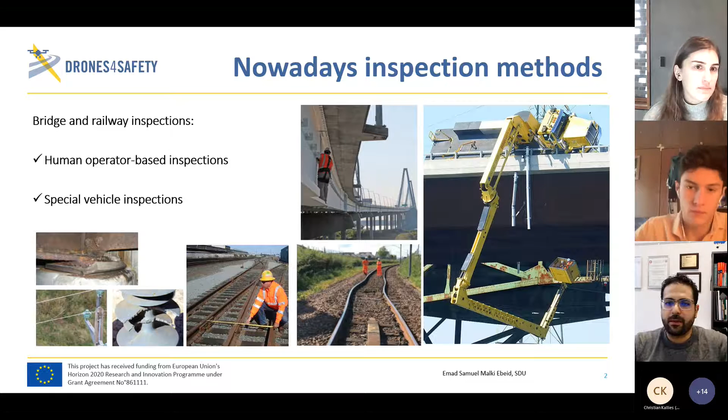So our mission is to remove this situation in which the human is at risk by using advanced technologies. That is Drones for Safety. We aim to build an autonomous, self-recharging, and collaborative drone system to inspect a large part of the transport infrastructure.

The project has 3 academic research partners - SDU, Aarhus University, and Fraunhofer - and industrial partners Del Air, NEAT, Deep Blue, ERIC, a research center from Italy, EU Center, and Eurocontrol for regulations.

We are at the same stage as the other projects, in the last phase. The project will end in May 2023.

So that is the overall concept. Our aim is to use power lines to recharge the drones. The drone will gain power, fly to nearby bridges, take pictures, and send them to the cloud. They will be analyzed, finding defects, and sent to the end user. They can do the same from railways.

We have very ambitious ideas to recharge from the railway lines, and also to inspect trains. We also discovered that many bridges are within short distance from power lines. If you go 1 kilometer from a high voltage line in Europe, you'll find 15% of bridges; if you go 3 kilometers, it becomes 70%. So it's really an approachable distance if you think about a drone flying for 20 kilometers.

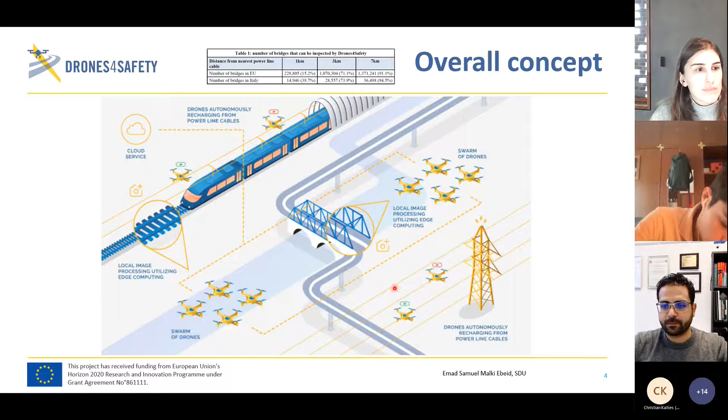Our idea is to make a set of drones, a swarm, capable of self-recharging from overhead lines. They do autonomous inspection, running algorithms on board using edge computing and AI to detect defects, training a neural network on the collected pictures. All of that is connected through the cloud for mission control - where the drone should go, what data to collect, and which path is good for them.

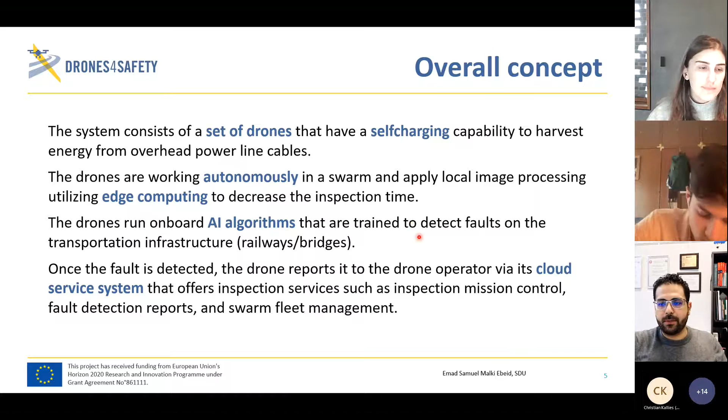In Drones for Safety, we built our own hardware platform, because our mentality is more research-focused - we'd like to get our hands dirty, opening up open source software and hardware, fixing issues, making them better, and getting it to work. We used a flight controller called Pixhawk and PX4 autopilot, from other EU projects, to make the drone fly. With this system, one can make any piece of metal with motors fly and be controlled from the ground.

And here we come with the companion computers. We use advanced computers called MPSoC, multiprocessor system on chip, that is FPGA based. The processor basically has two parts: a CPU, where we run ROS2, and an FPGA, where we run heavy algorithms like computer vision. That way we relax the CPU by delegating the heavy tasks to the FPGA side.

This computer is connected to sensors that are lightweight and fitting for our mission to detect cables and do the inspection. So the sensors we use, for example, are magnetometers, cameras, and also millimeter wave. We will see in the next slide how they look like.

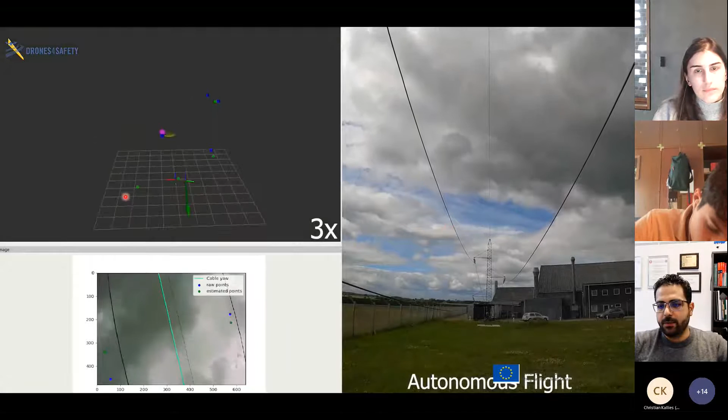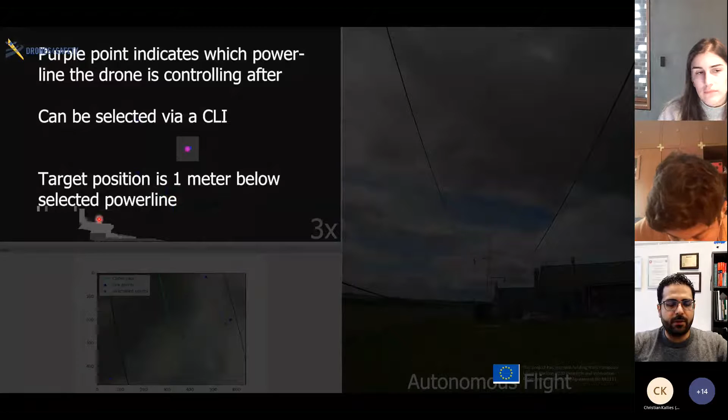This is one of the videos showing how the system works. Here we use simulation, with data collected from the drone. You can see the purple dot identifying the cable.

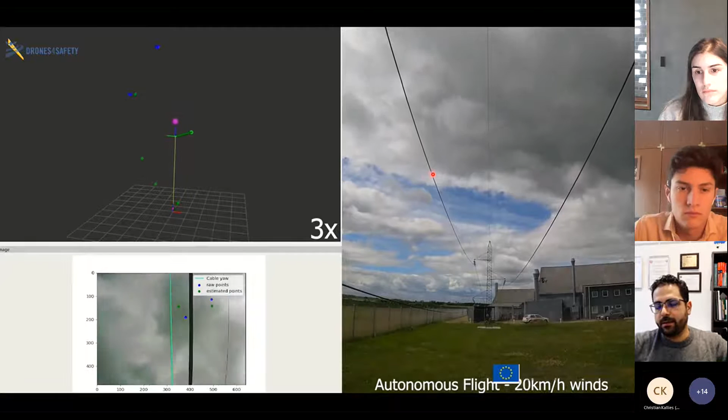One can select this and say, I would like to fly the drone to stay 1 meter far from this purple dot. You can see here the drone in autonomous flight, orienting itself 1 meter far from the power line. So it becomes really user-friendly. Once I go to line phase, say 1 meter or half a meter, touch the line, that comes from the CLI, and then we give it the command.

The drone uses two sensors, the camera to know the orientation of the line, and the millimeter wave to know exactly where the line is. We get really good results thanks to the clean background here, because we see the sky. So we have a really good and accurate system.

That is one of the latest works, in which the drone was performing a mission like this. Our latest article was published in the IEEE Access Journal, and it's open source, open access, so you can also see how the system and algorithm are designed and working.

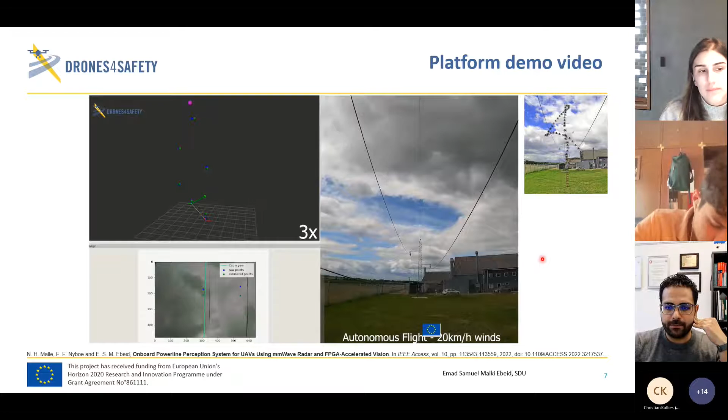The next part of the project is energy harvesting. When we charge, we have two types of lines: one is AC and one is DC. For the AC line, we benefit from the magnetic field. We use a split core current transformer with a coil to harvest energy, working as an energy harvester. We have to surround the line, so we grasp it and then induce current.

The other interesting part is the DC lines. DC means we need to connect between 2 points, plus and minus, and it requires a very advanced circuit that we are almost finalizing. Basically it's like a DC to DC converter to lower the voltage and charge the drone. The advantage here is that it's lighter, since we don't have a core, but it's also quite challenging to work with because the DC line requires connecting 2 points together.

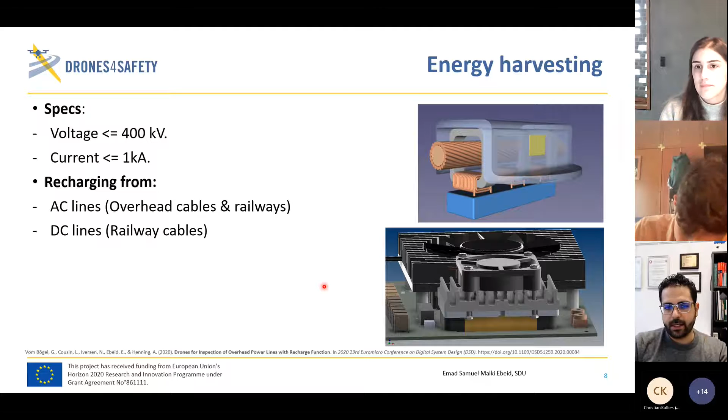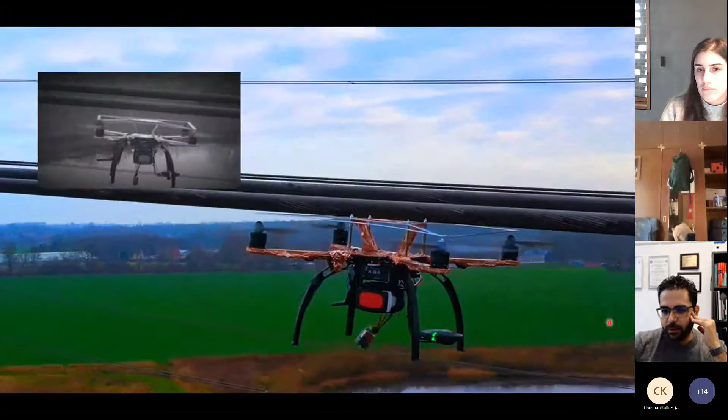Then we touched 400 kilovolts, that was basically in the street, you can see the houses behind. That was not okay, because there were some issues with the Faraday cage, so we had to redesign the protection side. Then we understood what went wrong, and now we have a better drone that is quite stable under a high magnetic field, and you can see there were some sparks here.

So we put the harvester, and then we went with the drone to the street again, and then we closed on the line to recharge the drone. And in that case, the drone is simulating a scenario in which it is recharging from an AC line by grasping, closing the harvester, and recharging. We had this work 5 months ago, and it was the first time in the world that a drone system can do that, to charge from a street power line.

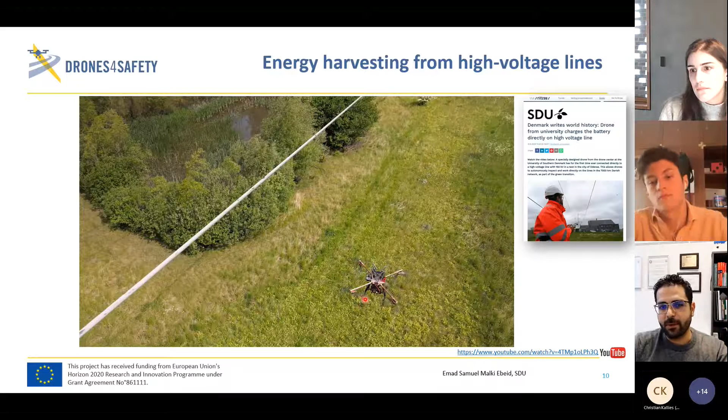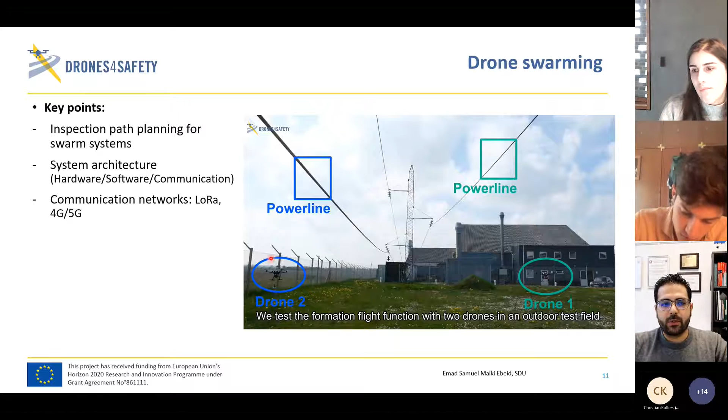Moving towards drone swarm, so here the drone is basically designed also to communicate with another drone, and build a better or a faster inspection mission using Wi-Fi, but also with 4G and the LoRa network. And that is a test of these 2 drones. They are on a mission to follow lines. One chose to follow this line, the other one follows the other line. They communicate together to coordinate, to understand where to go.

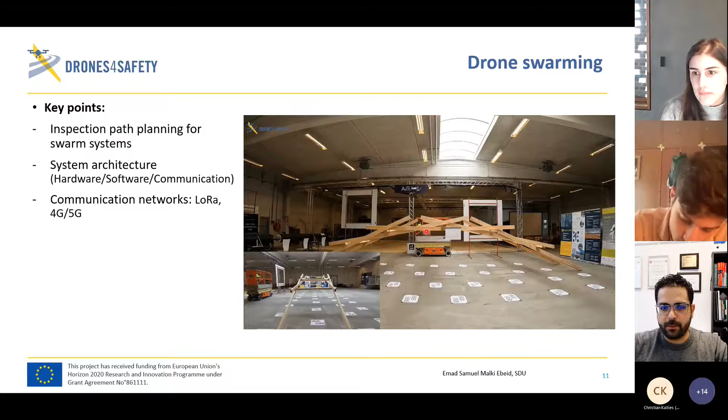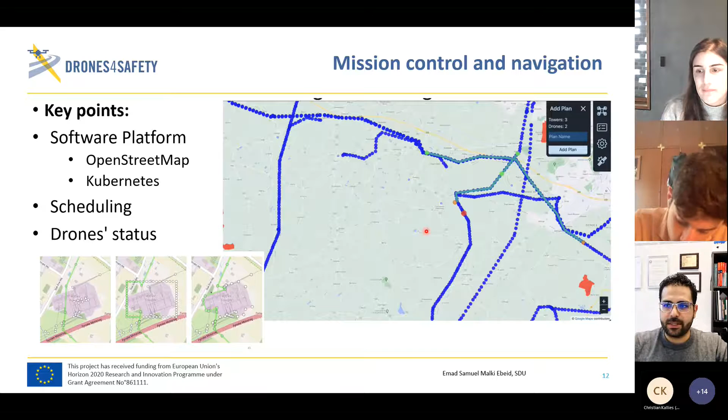And here is a mock-up of a bridge in which also the drone is following the bridge autonomously. They are not really following these markers, but it is using vision to follow the bridge. This is about mission control, and Lea will speak about it later to show you how the system is designed, so I'll skip it. And here is the AI for fault detection.

And here the AI part is basically to collect as much data as possible, label them, and say that there is maybe a broken wire, or there is a crack on the bridge, and so on. And in the project, we are using a supervised machine learning algorithm. We tried also with unsupervised, but the results were not that great.

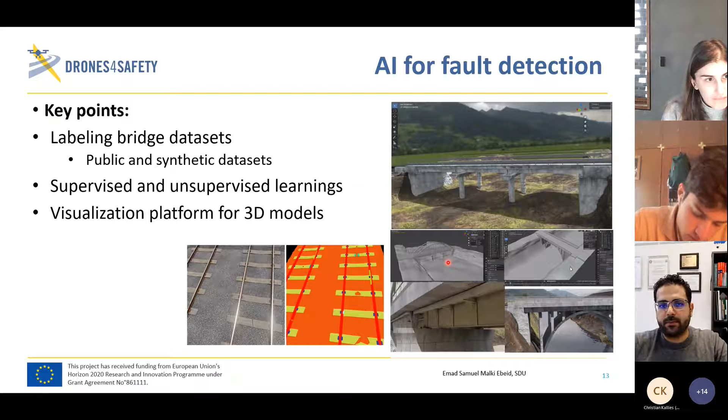So the future idea will be here, the end user will see a 3D model of the bridge, as you can see here. That is from our partner Altea. And then based on the detected images, the images will be stitched on the bridge. So the owner of the bridge can zoom in and find the defects. And there is a video showing how this works.

So after the drones are flying and taking pictures, they are sent to the cloud. The cloud has a 3D model of the bridge. The AI algorithm is running on the collected pictures. And then here the AI identifies some cracks, and then from the data one can know where exactly this crack is. And that is the mentality here of the AI algorithm.

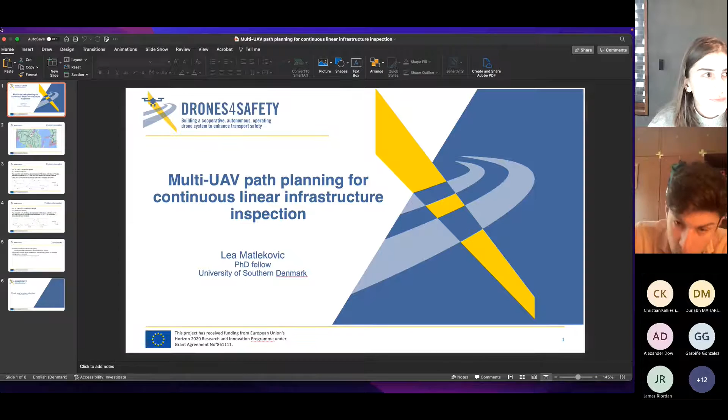Let me open the presentation. Okay. Are you able to see it in presentation mode or just the presentation? Yes. Maybe you have to put it in the presentation mode. Yeah, it is, but I have a lot of screens. Let me try again. Okay. Okay, now it should be good. Thank you. Okay, good morning, everyone.

My name is Lea, and today I decided to present to you my ongoing research work, which is continuous path planning for inspection of linear infrastructure like railways or power lines. And actually, these algorithms are part of the Drones for Safety project. And the work of my team in Drones for Safety is to develop applications for global high-level path planning. So whatever we can calculate in advance before the drone starts inspecting, we try to do it on the cloud and then send information or send waypoints to the drones to fly.

So in this problem, the question is, if we have a number of drones, here you can see the orange dots, which represent drones, how should we divide this graph? Let's say that these blue circles represent power lines in this case, but it could be railways or any kind of graph looking like this. So the question is how to divide this graph, now in three different parts because we have 3 drones for inspection.

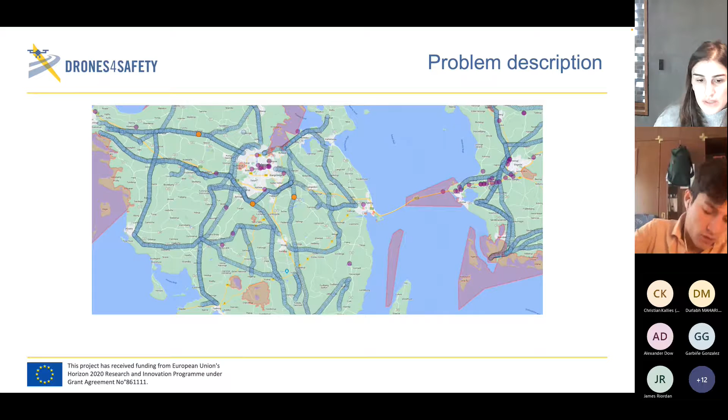So first we started with describing the problem. First, we describe the problem as a graph covering problem. So we define the nodes, and then we defined edges. And each edge, we gave it a cost, which in our case represents the distance between two nodes. And then we have a number of drones, which is k, and the objective is to find the decomposition of this graph

into k different graphs. But in this case, when we have just inspection distance, when we divide the graph and create two graphs, some solvers we found could usually find this solution. So basically, it divides the graph into one part, which is like nodes 1, 2, 3, and the cost is 16, and then the other part where the cost is 24. The first drone should start inspecting the first graph, and then the second drone will inspect the second graph. And the total cost of inspection is then 24.

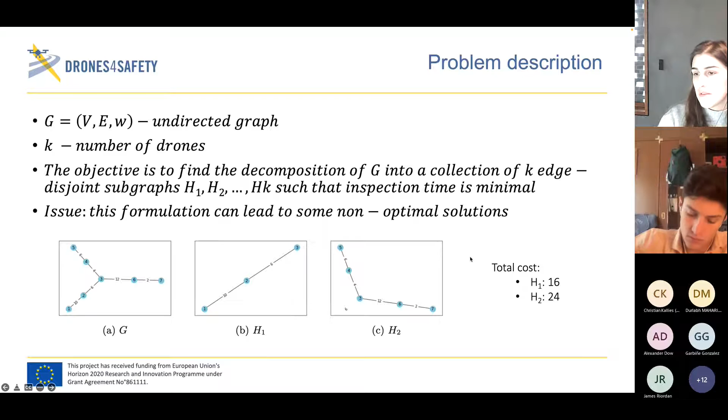After a little bit of thinking, we realized that if we just allow drones to pass through from one node to another without inspecting, and if we assume that inspection flight time will be longer because the drone will probably fly slower in order to capture everything with camera. And if we just want the drone to fly through from point to point, it can fly in higher speed. So we decided to redefine this problem and define the graph weights with weight for inspection and weight for just flying. Basically, weight for just flying will be less than weight for inspection, because inspection will require slower flight and it will cost more then.

So in that case, we developed a simple constraint solver, which was able to solve this problem. And it divided the graphs in these two graphs, where the first graph is also cost 16 for inspection, and it also continued inspecting this edge between 3 and 4. But the other drone now did the inspection of the first 3 nodes, but then it just flew through this part in order to reach node 4 and to inspect this edge here. So in total, the cost for the first drone increased, and now it's not 16, it's 20. But the total inspection cost is lower than in the first case, and this is what we wanted to achieve. So in this case, it's 22.

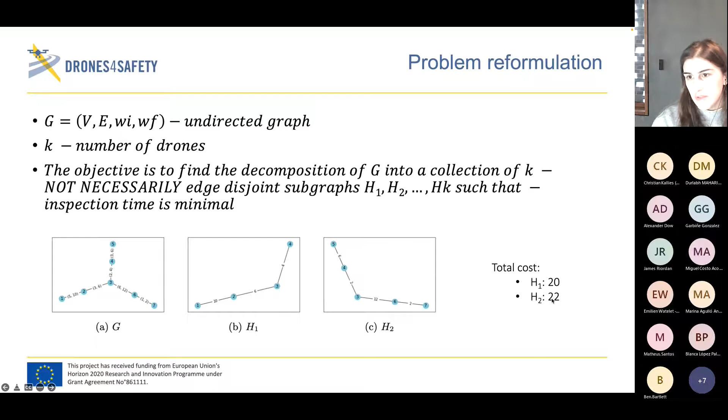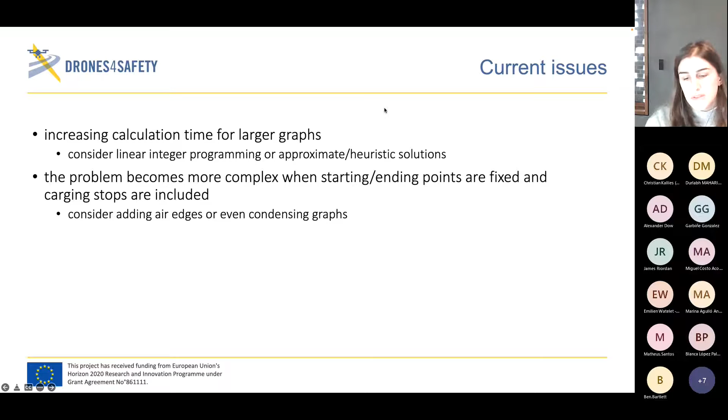Now, we encountered a lot of issues, and we would also like to work more on this problem, because we still need to consider starting points and ending points. This could make the problem more complex, because it will probably decrease the optimality of the solving. And also, we would like to include the charging part where the drones actually figure out that they need to charge, they hook on the power lines, and then that should also be included in the cost. And the issue we are dealing with right now is that for larger graphs, it takes a lot of time to calculate it with this simple constraint solver we developed. So we are trying to work on some more heuristic solutions in order to find maybe not that optimal, but quicker results.

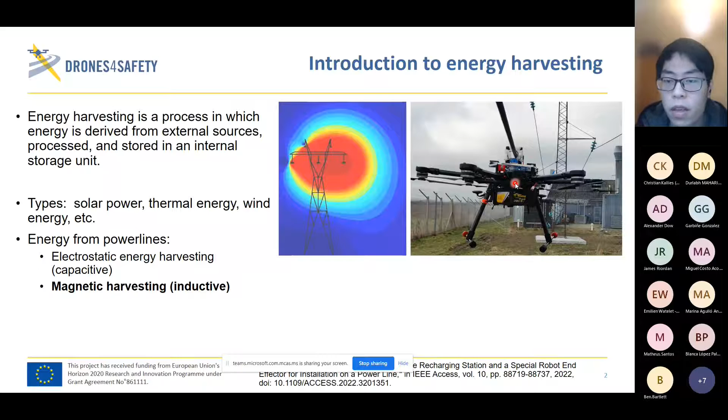And in Drones for Safety, we use the energy from the power line cable, as you can see in the left figure here. The drone will fly close to the power line, grab on the power line and recharge its battery from the magnetic field around the cable, because we already have the 60 or 50 hertz AC current flowing in the power line.

So the most important part of this is the magnetic core. We need to analyze every characteristic of the magnetic core to choose the best one for energy harvesting. The first one is permeability, a parameter that indicates how well a magnetic material can conduct flux. We figured out that a magnetic core with high permeability is not always necessary, because with permeability around 2000, if we keep increasing it to 10,000, we don't get much more harvested power. In other words, it becomes saturated.

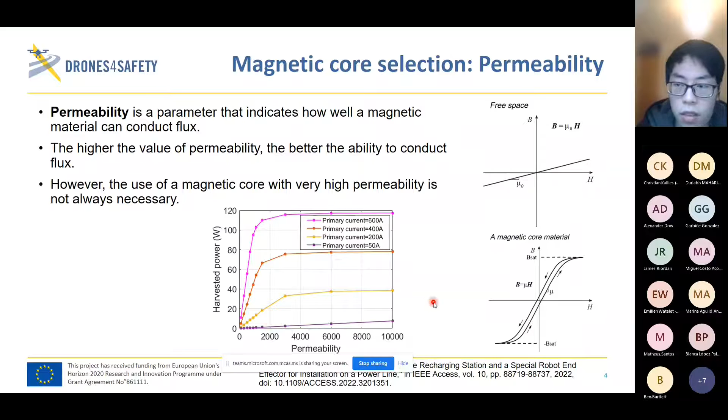The second characteristic is flux density. The ideal core should have the highest saturation flux density, and we figured out that cobalt iron had the highest magnetic flux saturation. Ferrite is a common material for current transformers, but it has very low magnetic saturation, so that is not a good choice.

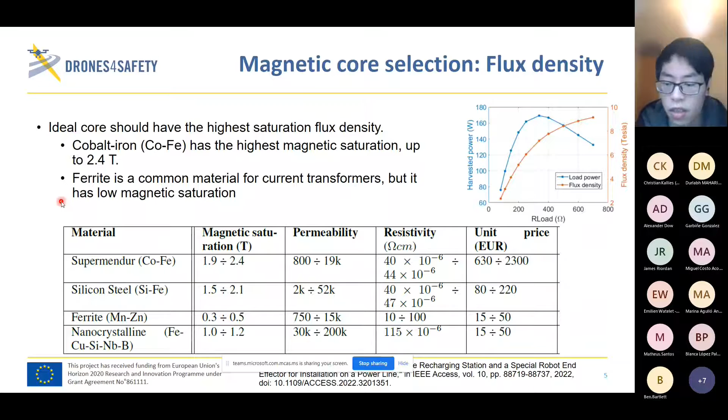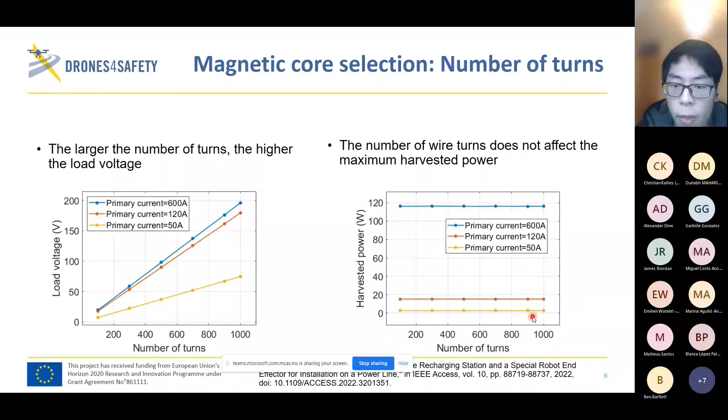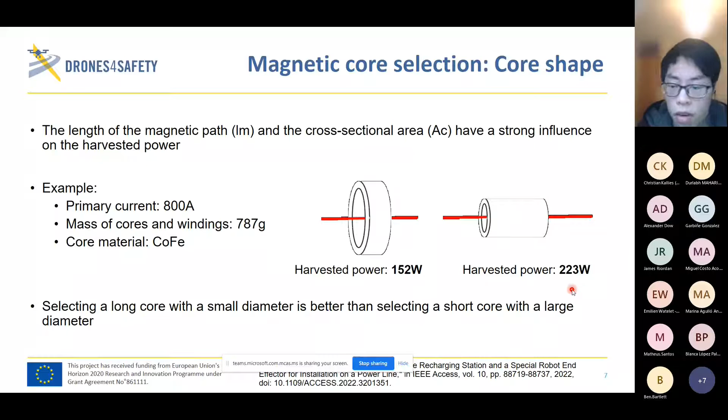Thank you very much, Viet, for your presentation. Also very challenging, I can see. Okay, now we have the turn for questions and answers. So you are very welcome to ask anything you would like to ask. Anybody? You only have to open your microphone and ask.

I have one question for Lea. I would like to know the software you used for this segmentation. How did you plan the problem, using which software? So you mean the constraint solver? Yeah. The constraint solver is developed in a software called MiniZinc. I didn't know about it before, but it's an open source project from a university in Australia. It's like a programming language for solving constraints: you define constraints, and it already has implemented solvers inside. You choose which solver, and it solves your problem with iterations. That's why it does not work for large graphs.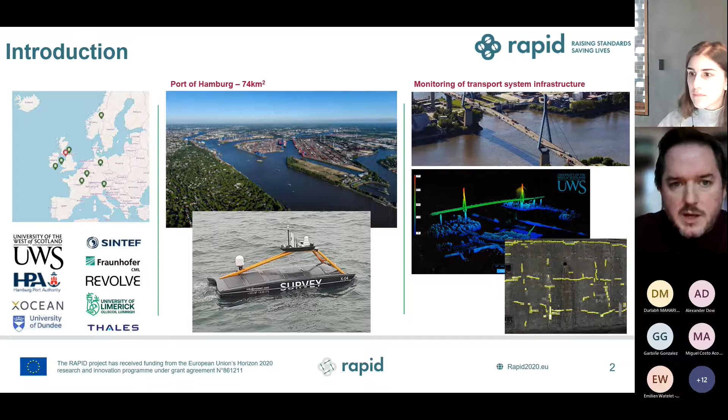So one of the approaches we take in RAPID to be able to access the sites that we want to survey is integrating a swarm of drones with an uncrewed surface vessel, like the one in the image here, an offshore survey vessel manufactured by one of our partners, XOcean. The project is split across a number of use cases involving emissions monitoring, ship hull inspection, coastal zone emergency response.

But the main priority, similar to other projects in the cluster, is monitoring the condition of the transport system infrastructure, so bridges and the lock network throughout the port. Across this site of 74 square kilometers, we're typically looking for features of interest that are sub-millimeter, like hairline cracks, to discover cracks we didn't previously know about, or changes to cracks we did know about. Any changing morphology might indicate some deeper structural deficiencies.

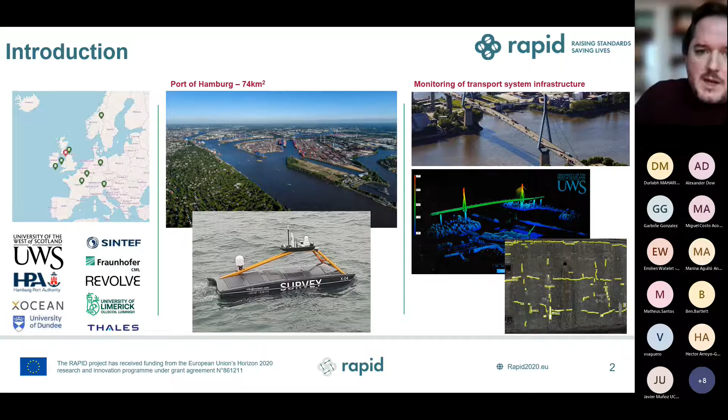So to come from the start of the project, which is about 2.5 years ago now, up to a final demo in about 4 to 6 months' time, we engaged a TRL escalation strategy where most of the partners will have access to local test sites, in particular operating out of airfields.

So this has given us quite a degree of experience in engaging and operating with air traffic control, local police services, city regulators, involving maritime regulations as well, because we're quite a maritime focused project in terms of the use case in a port and harbour. And also experience in operating in field with crewed light aircraft and helicopters and the challenges there, and specific operational risk assessments and so on.

So we, UWS, operate out of Strathaven Airfield. Our partners, University of Limerick, they operate out of Newcastle Aerodrome on the east coast of Ireland, and this was where we had one of our first consortium tests back at month 22, so April of this year. It's quite fortuitous that airfield is beside the sea, so it's a coastal airfield, and a rail line runs through it, so it has provided opportunities as well along the way to build up expertise in survey inspection of, for example, railway bridges and so on.

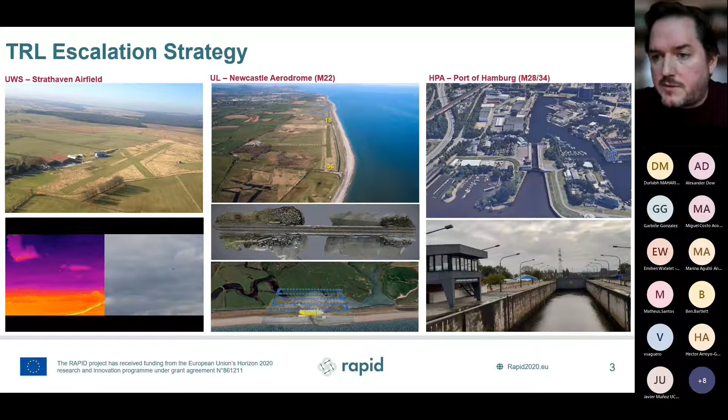Within the Port of Hamburg, as well as the showcase bridges, we're also quite focused on inspection survey of more routine infrastructure like the lock network. So the Harburger lock shown here has become one of our test sites. We had a test in Hamburg in September where we brought the whole consortium together to test the swarm and the various building blocks within the service.

Typically, our workflow, we will deploy multiple drones in a swarm configuration, spatially segmented, and allocated tasks according to their payload sensors. So what we will typically do as a first stage is we'll do a high-level LiDAR survey to get the wide-scale and global view of the site, identify any hazards, and from there we'll get some very high-resolution 3D photogrammetry models of the site, and this starts to build out a digital twin that we use for mission planning, but also then for containerizing the data that we collect.

And the end line of the service then is an embedded neural network which resides on board the drones, processes the camera imagery as it's collected in real time to detect any cracks in the imagery.

The approach that we've taken is we've used a commercial off-the-shelf system, the DJI M300s, and we've adapted them with either standard or custom sensor payloads, depending on whether the drone is being modified for a survey task or whether it's being modified for airspace surveillance. And we mount our own embedded compute, which are typically either AGX or NX systems from NVIDIA, running our own custom software. So within the consortium, I think there's about 7 M300 drones that are all configured for a specific purpose.

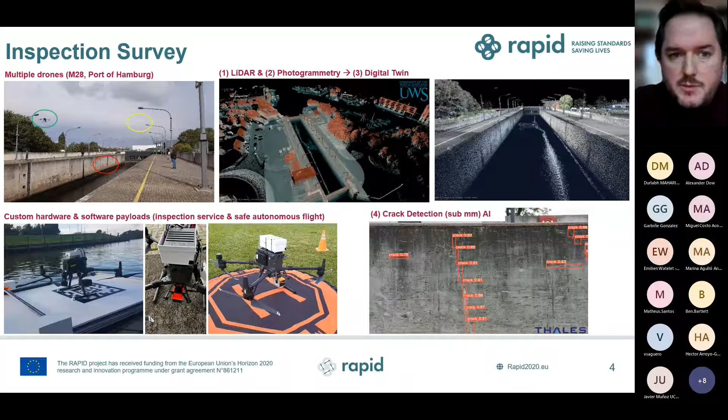One of the things we've done here is obviously to provide mobile mission support and energy management and transport around the port site. We've integrated with an uncrewed surface vessel. This has required a whole series of stages around autonomous landing and takeoff from the USV. Our energy management solution is that when the drone lands on the USV, it is grabbed, put into a fixed hold, and the batteries are hot swapped. So there's a mechanical hot swap system.

We will typically, with a 2.7 kilo payload, get about 35 minutes of flight time. It would typically take about 35 minutes to charge the batteries, which have a 550 watt energy budget. Using this system, we get a hot swap in under 3 minutes. So it significantly improves the duty cycle of the drones when you would be in a situation where you wouldn't have a human present to manually swap out the batteries.

This is all fed into an energy digital twin as well, which optimizes the solar harvesting on the USV and compensates for the fact that some of the panels are now removed to provide the landing gantry for the UAVs.

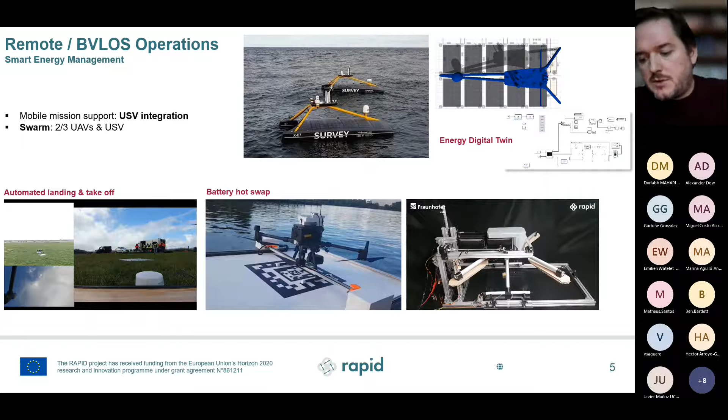All in, when we bring all of this together - the fast AI detection of cracks in the imagery, the swarm multipliers, and the improvement in the duty cycle with the hot swap - we're typically looking at somewhere between 10 and 30-fold efficiency gain in terms of speeding up the missions. So in terms of improving the productivity of the overall service, we've been quite happy with the results we've seen so far.

The other aspect of this is, because we're introducing drones into a densely populated environment where there can also be other drones and light aircraft present, one of the things we've very much focused on is the hazard perception side. We operate within the specific operational risk assessment produced by EASA, where we need to identify hazards pre-mission, strategically and tactically mitigate for them, and consider the overall liability of the operations. Moving more towards performance-based standards from the current risk-based standards, we've started to focus on things like pilot-to-drone, drone-to-drone, drone-to-swarm, and incursion detection.

So we have a number of firsts here that we're due to publish. First of all, we have one of the first point-based detection and localization systems embedded on a drone. This uses LiDAR and radar to detect drones within a swarm and incursions on a perimeter out to useful ranges of 100 meters plus.

Our partners at University of Limerick have also developed a system for detecting incursions by light aircraft and helicopters that has performed out to about 3 kilometers, which far exceeds the requirements for beyond visual line of sight monitoring.

We've also started to investigate the pilot perception challenges, where we may be operating in environmentally challenging conditions, like heavy rain or into the glare of sunshine, to ensure that while we automate all our missions, if a ship, helicopter, or uninvolved person enters the situation, the pilot has to take physical and cognitive control of the drone and move it to a containment area. If we're operating at the extremities of visual line of sight, this can be particularly challenging.

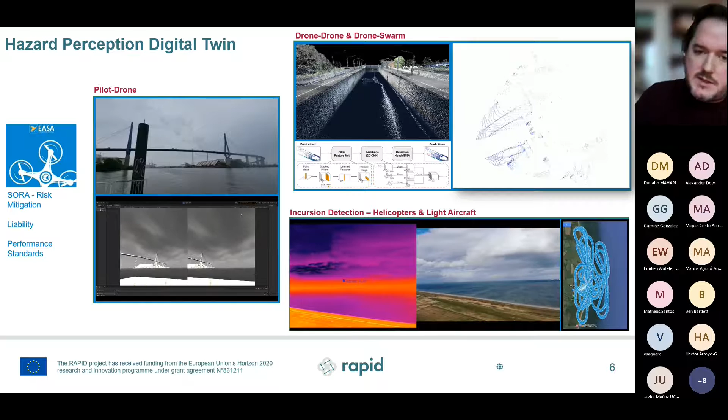So that is a very quick overview of the RAPID project and where we're currently at in terms of progress. We have a final demo that we anticipate will be scheduled for May of next year in the Port of Hamburg, and we'll circulate information on that once we have a date nailed down. So if you want any further information, please just contact myself or Suhansu or any of the PhD speakers who will follow this talk. Thank you.

Thank you very much, James. Very, very amazing research. Congratulations.

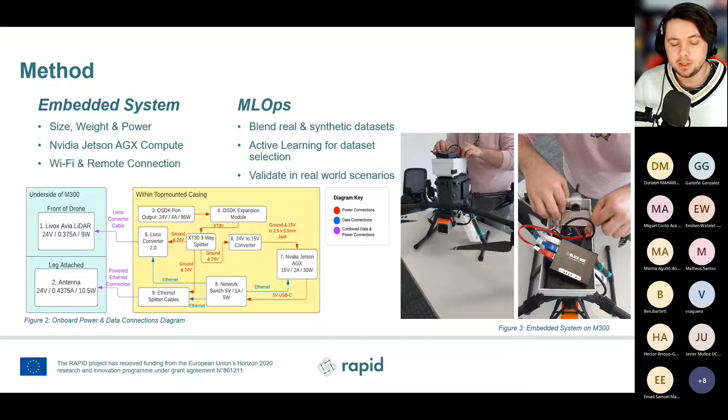We designed an onboard compute using the NVIDIA Jetson AGX, and made use of a LiDAR, the Livox Avia, a Wi-Fi antenna to provide connection to the ground, and a top-mounted casing which included all of the OSDK connections, the power connections, and the onboard compute itself. We then use MLOps as a framework to design, develop, and deploy our artificial intelligence network in real-world scenarios.

Moving forwards, we have further testing coming up in May 2023. I will be working to optimize the neural network's performance using those previously mentioned MLOps training cycles.

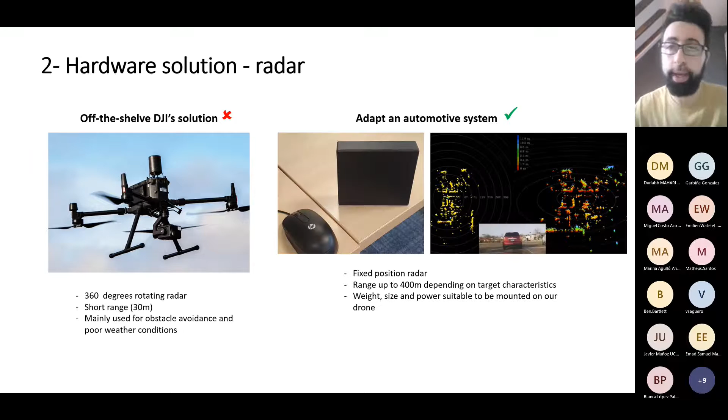So we turned into the automotive sector, which is well advanced in this field, and we went for this system that is sort of like a smartphone size, so to speak. It gives us the range up to 400 meters depending on the target characteristics, and most importantly it has the right weight, size, and power suitable to be mounted on the drone.

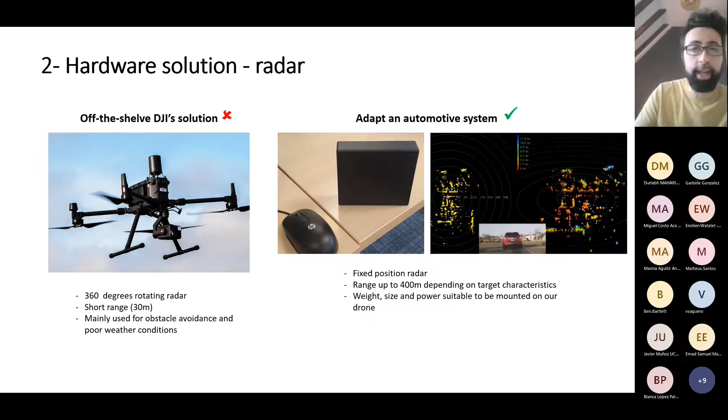So with this setup, basically we've focused on ground-to-air and air-to-air work. The ground-to-air work has been mainly to understand the sensing capabilities of the radar. So for this, we've set up pre-planned missions and specific data collection strategies that we've then used to develop 2 different AI pipelines.

So the first AI pipeline is a projection-based type of network. It takes the 3D point cloud and projects it either onto the horizontal or the vertical plane, and the features of each point of each radar return are passed as channels to that image. The network returns a per-pixel label, and as you can see here, it does quite a good job at discriminating between the ground returns it gets here and the drone returns that it gets up in the air.

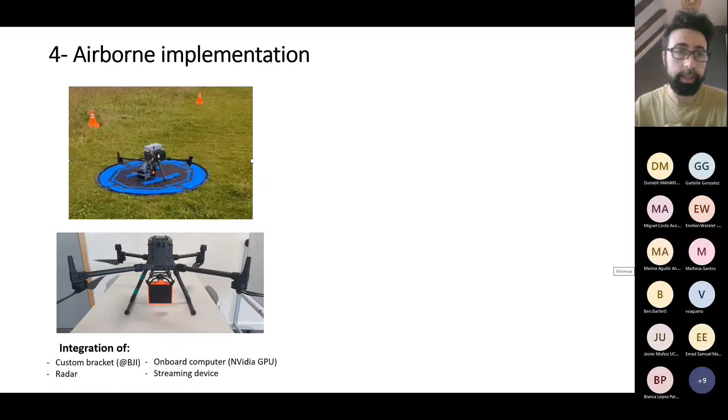Now we move on to the airborne implementation. A lot of this work on bringing the radar up in the air is thanks to the work that my colleague Alex just mentioned, and also help from other partners within the Rapid project. It's basically about getting everything together and making sure it's a robust system that can take off and monitor the space as we want.

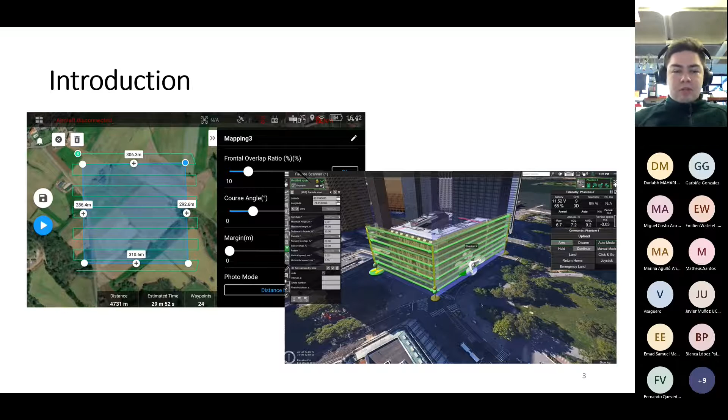So the overall workflow, I'll summarize here. The mission is, as usual, created to cover the general area. In addition, the operator decides on an area of interest for the high resolution scan within this general area. The first level scan is completed over the area. These images are then downloaded and a low resolution 3D model is generated, in combination with a new flight mission for a close quarter inspection. This flight plan is reviewed and then executed. This process is repeated as many times as necessary. Usually this is completed in 2 stages.

So the initial mission plan begins the same as any other mission. You choose your approximate area that you wish to survey, generating a mapping mission on the controller at the height and with the required payload. Here we can see a lock in Hamburg as the area we wish to survey, for example.

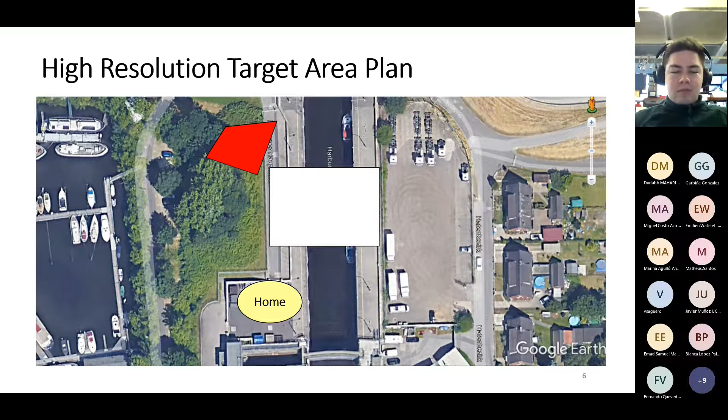The next stage is to designate the following areas. The home point is where the mission will start and stop. The target area of interest is also defined. There's also the option to specifically exclude an area, denoted as shown here. If this area overlaps with the area of interest, this area will not be reconstructed.

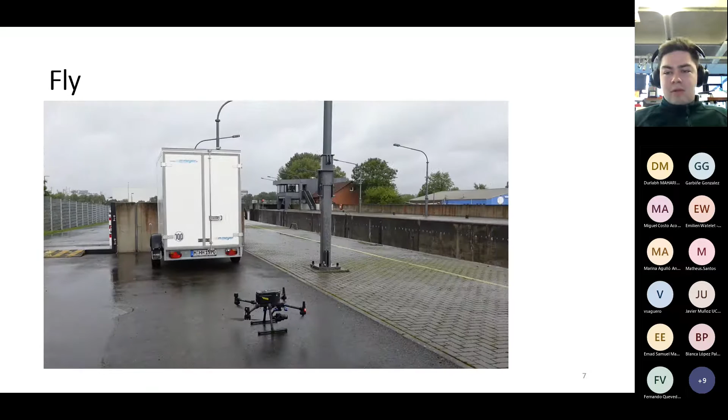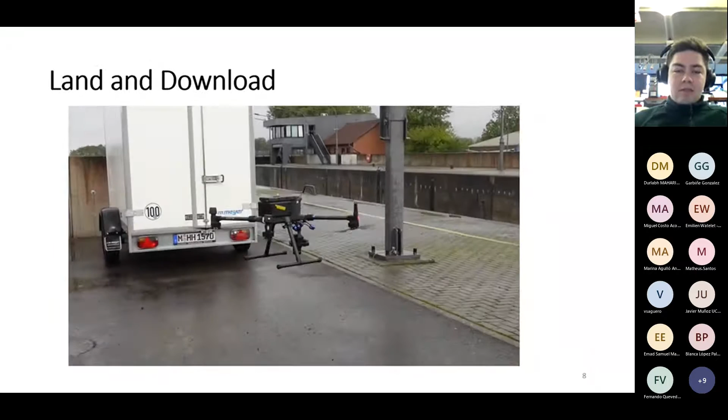Now we're looking at the full workflow. So this download process is not currently fully autonomous, but it's currently under development. We have developed an Android application which utilizes the onboard MSDK, mobile SDK. This runs on the controller, requiring no additional hardware. Once the drone lands, the images from the survey are autonomously downloaded from the drone to the controller. Currently this is just a button click within the MSDK application, but we're going to be using flags in relation to the mission status to determine if the drone has successfully completed the stage 1 survey.

Model and mission generation. We have a PC being utilized for stage 2 reconstruction. A web server has also been installed on the controller to allow the processing PC to access these payload images. A script is running on this PC, which waits until all images are downloaded once the survey has been completed. This works for any size survey of any area. The only current limitations are the download or computational speeds. This script then creates a Metashape project, generating a depth map, a 3D model, a DEM, and finally a waypoint mission for the high resolution inspection.

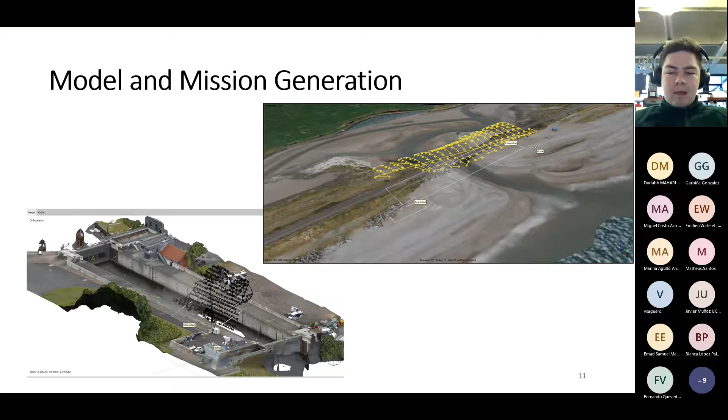The parameters for this are decided upon based on the infrastructure in the area. For example, the bottom of the lock is lower than the home point, so this has to be accounted for when the parameters are selected if we want the drone to fly into the lock. The GSD achieved with these models is about 15 millimeters, so it's quite a low resolution model. So once the mission is reviewed, we can automatically fly the mission that was generated.

As you can see in these videos here, the drone is flying very close to the infrastructure and taking multiple images at different angles, heights, and orientations to be able to generate a much higher resolution and extensive 3D model of this area. This would be impossible to generate manually. These images also run through another process to determine if cracks in the infrastructure exist. The GSD achieved with this model is then 0.7 millimeters.

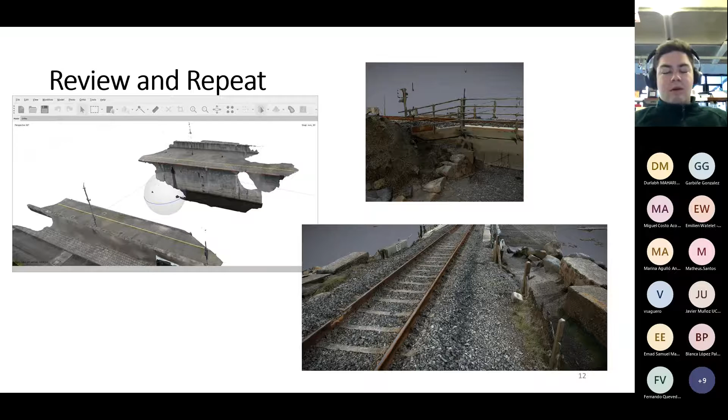And then if higher GSD is required, another mission can be repeated as the same process goes on. If any cracks are detected in that separate process while this 3D model is being generated, another close quarter inspection can be completed on those areas of interest and a high resolution mosaic image generated. That's the mission. That's it there.

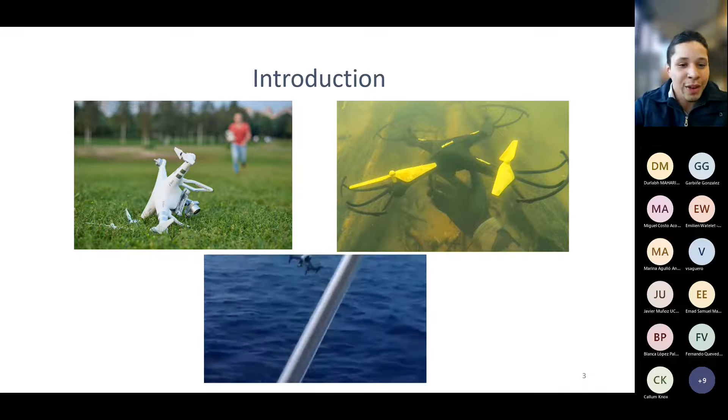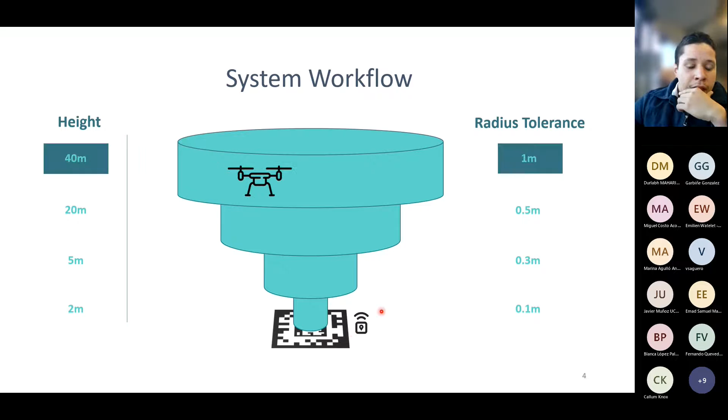That's why, in the system we are proposing, we have our drone here, and our landing pad has a marker on it and a GPS device that is sharing the GPS location. So when we start the landing procedure, the drone receives the GPS location and flies to that position, and then we change from the GPS position to the visual-based landing.

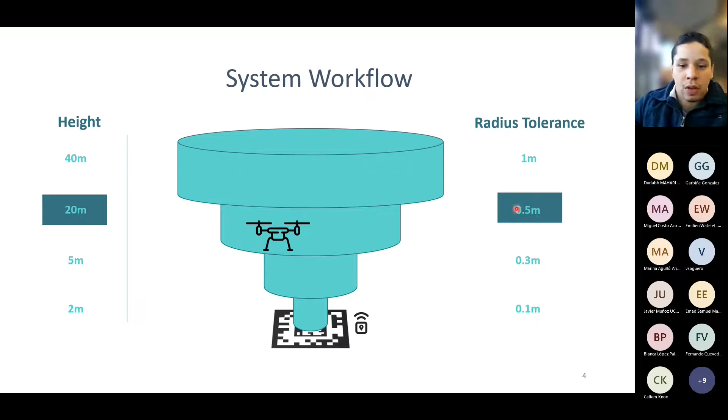At the moment, we have this cylindrical area where the drone is detecting the marker, and we have different heights with different radius tolerances. So up to 40 meters, we have a radius tolerance of 1 meter. And as the drone is descending, we are tightening this tolerance. So 50 centimeters. When we reach the mark of 5 meters, it's 30 centimeters. And at the last 2 meters, it's 10 centimeters. And then we can land the drone.

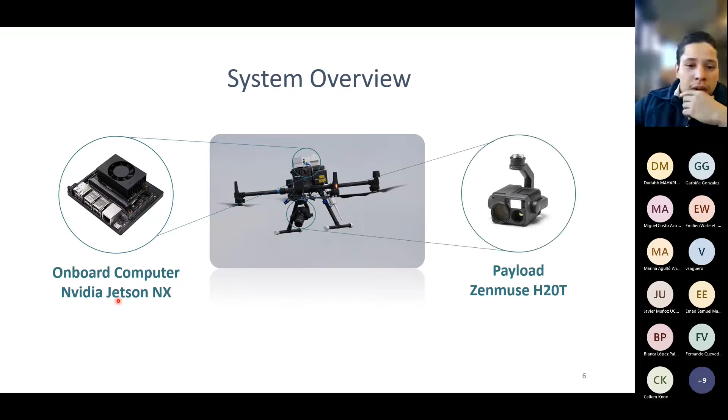Our system is composed of the M300 drone, and on top of it, the NVIDIA Jetson NX as the onboard computer that's responsible for receiving the data, doing all the processing and sending the commands to the drone. As a payload, we're using the Zenmuse H20T, which has the zoom feature that allows us to start the landing up to 40 meters. And we're integrating the system with ROS.

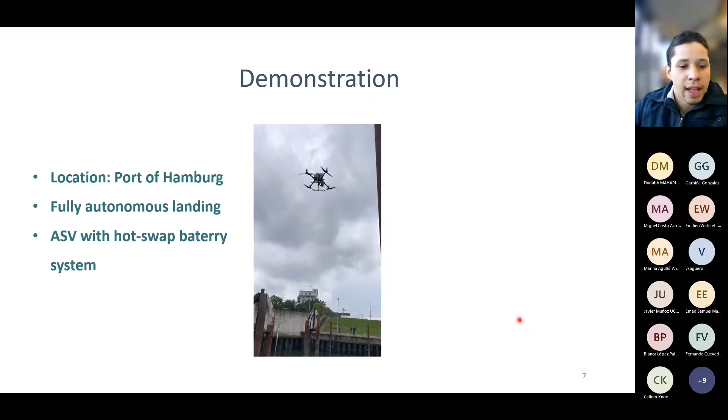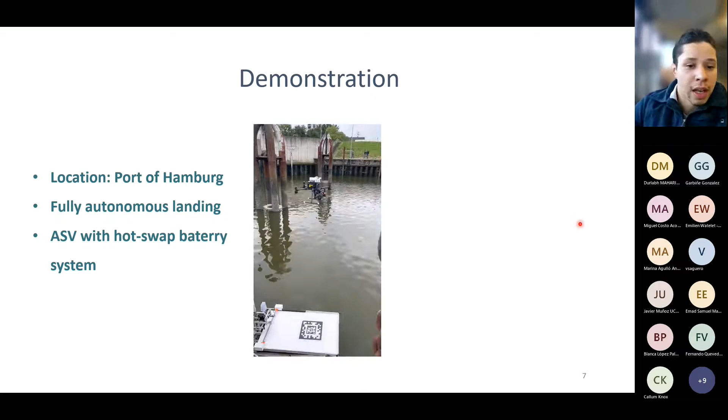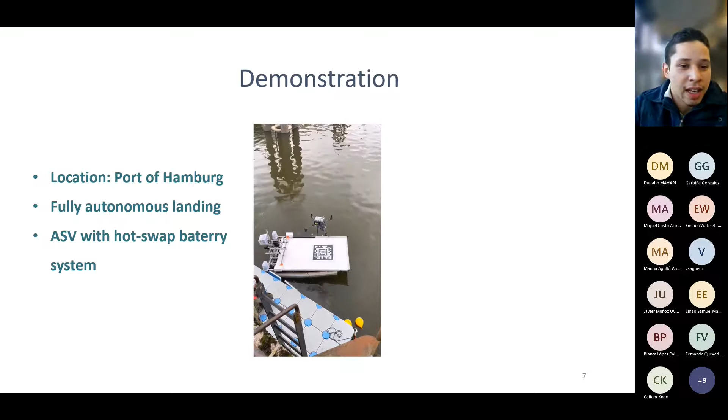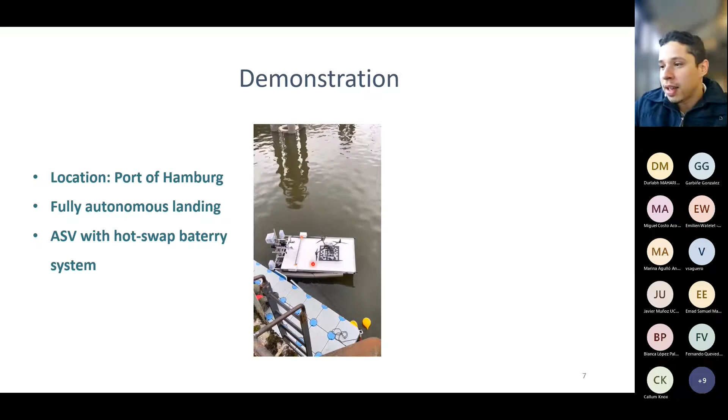So this ASV has a hot swap battery system. As soon as we finish the landing, we activate the hot swap, and then we're going to change the batteries for the drone, and we are ready to go for the mission again. So it just completed the landing, and you can see that the hot swap system is starting. It's coming, it gets the drone back, and then it swaps the batteries.

So just to summarize the presentation, we presented the landing system integrated with the ASV. It's suitable for offshore operations, so you can do your inspections or any other mission and just come back to your ASV, change the batteries and keep going. So it's a solution for a fully autonomous system. You have the long range landing with the zoom feature, so we can go up to 50 meters, detect the marker and start the landing, and the integration with the hot swap system.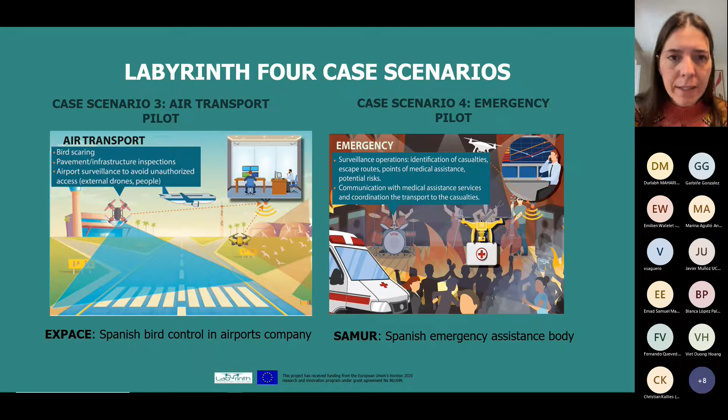So this is my presentation, and now we are shifting turns here. First of all, the presenter will be Fernando Quevedo from University Carlos III in Madrid, and he is presenting a path planning network service design and architecture.

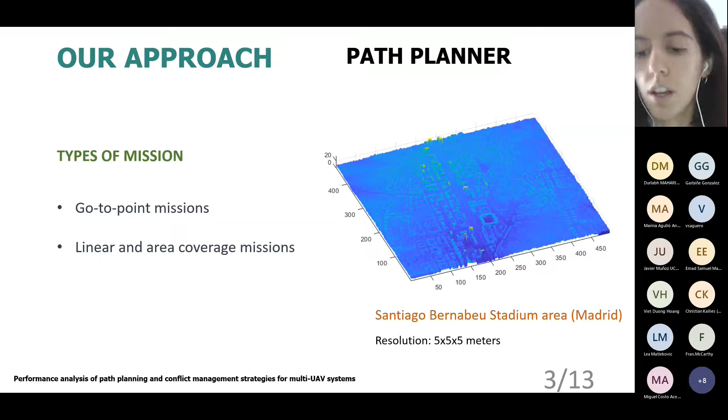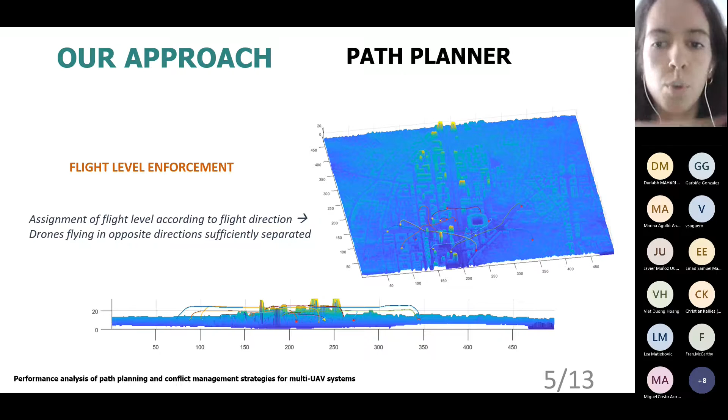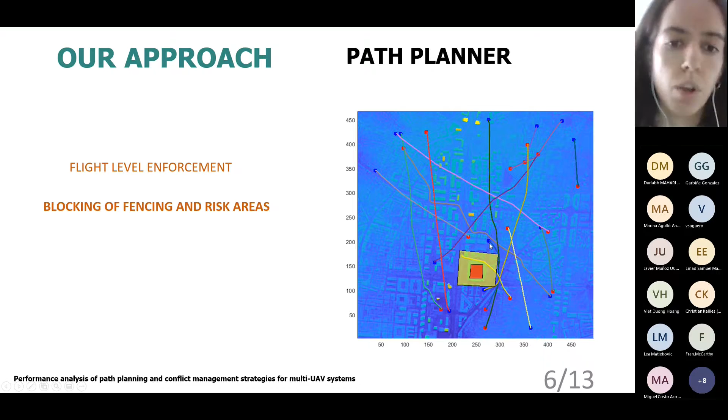For instance, we have assigned and established flight levels to ease air traffic according to flight direction. This flight level is not just a fixed altitude, but it is dependent on the ground terrain level and on potential obstacles of the environment. Another constraint we can add is blocking or fencing areas. For instance, in this image, a no passing zone marked in red has been added, and also an avoidable or risk zone marked in yellow.

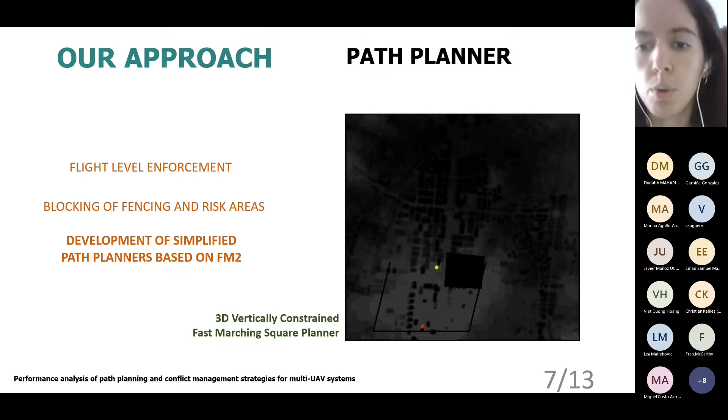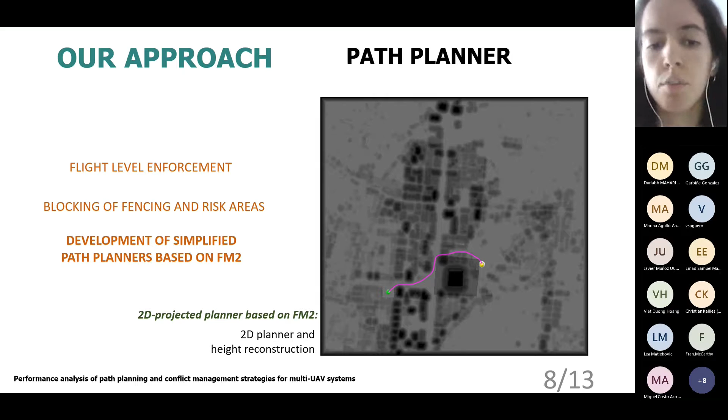And also by modifying this viscosity matrix, we can achieve that the path planner is speeded up. So for instance, in this case, we limit this wave expansion with a vertical trench suitably oriented from the starting point, the red point, to the goal point, the yellow point. So another example to speed up the path planner could be this 2D projected planner developed. In this case, considering the flight is going to be performed, as I've just said, in a flight level, the obstacles interfering with this flight level are projected into a two-dimensional map, and then the path is computed in this map, and then the height of the path is conveniently reconstructed.

So maybe some conflicts may not be resolved by this simple strategy. So these conflicts are detected and resolved by dodging maneuvers performed by means of free flight passages. These free flight passages consist on just modifying this viscosity matrix I was just talking about, so that no two different trajectories cross each other. So this strategy can act as a conflict management strategy on its own, just by computing free conflict trajectories right away, or used with the speed control strategy for dodging maneuvers.

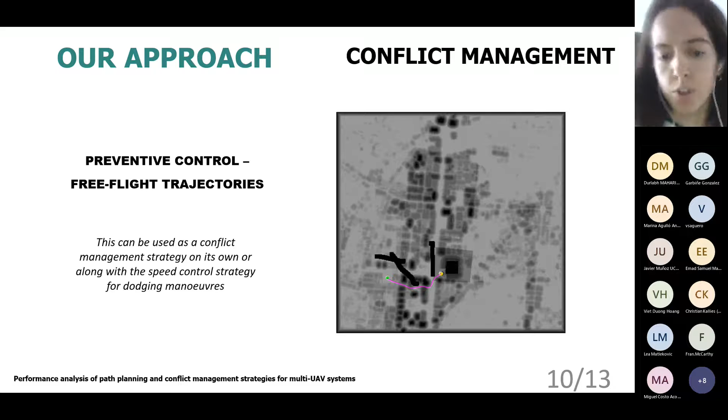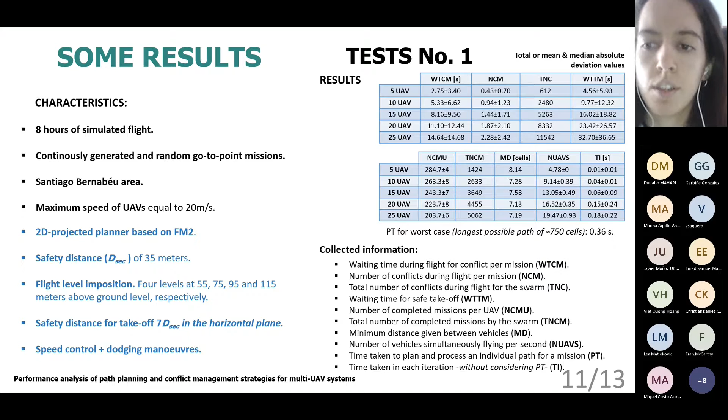For instance, for the longest possible path in this scenario, that is about 750 cells, the computed time for the path planner is 0.36 seconds. And lastly, for the scenario with the free flying trajectories, we also obtain that the safety distance of 7 cells is preserved in every case.

And also, as in this scenario we don't have the safe takeoff control, more completed missions were obtained and more UAVs could fly simultaneously. And also we can see in this table that the computing time for a new mission can be obtained after about 3 seconds or less.